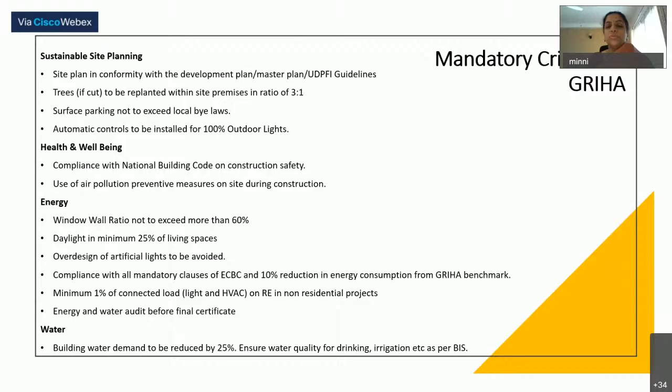Water quality has to be met as per BIS standards. Plus, building water demand should be reduced by at least 25% from the benchmark.

We had also done quantifications for every tool, for energy and for water. So if it is GRIHA 5-star, and suppose the benchmark is 90 units per square meter per annum, a 5-star building means a 40% reduction from this benchmark. We can quantify how much savings we can achieve.

We had quantified at a particular time that if 10 million square meters of buildings in India are GRIHA 5-star, then one could power another 100,000 homes. We would have so much savings that we could meet the water demand of another 22,000 homes. Plus, it would mean 6 megawatts of rooftop PVs would be installed.

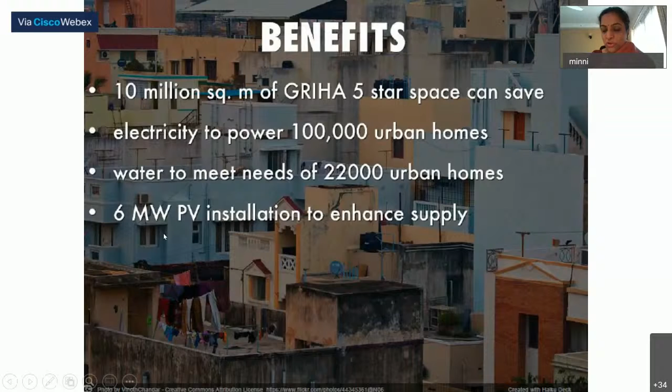So it is a very good resource for quantifying the savings one could have. Very quickly, let's look at the kind of architecture these certified buildings have shown.

So these are already built, already being occupied. This is a government building in Pune, where passive architecture, the louvers, the envelope, was completely designed as per the sun path of Pune. This is IIT Kanpur, very well designed, a Griha 5-star project again, meeting 10 to 20% of its energy demand, though it was not a net zero building.

See the kind of quality of light—it is glare-free diffuse daylight. This is possible because these certifications push building clients and consultants to do either hand-based calculations or software-based dynamic simulation, so you can predict daylight levels and energy consumption. This is the Suzlon One Earth project in Maharashtra, where double screening is given to cut heat gains while integrating light levels.

This is again inside Suzlon One Earth. You can see the openings are divided into two parts, so you have a vision window and a daylight window.

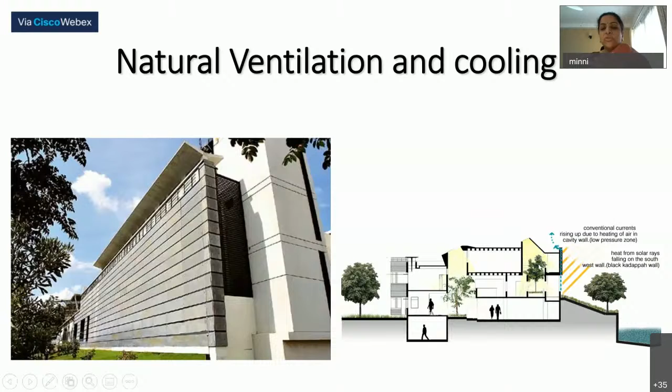You can see how the skylights have been designed based on the latitude angle towards the north orientation. Similarly, openings have been given to enhance stack effect and the quality of light in our TERI building in Bangalore, which is visually very comfortable. Occupants' comfort levels and productivity are very high because it's a fully naturally ventilated building.

Fortis hospitals were one of the first hospitals to get certification in the early 2000s when Griha was evolved—in fact, when it was called TERI Griha. Fortis, then AIIMS, and a series of hospitals started getting certified because they saw huge operational cost reductions, in crores, due to optimization of lighting and HVAC design. There isn't much scope for envelope optimization in hospitals, though insulation helps, but there's a huge scope for lighting and air conditioning.

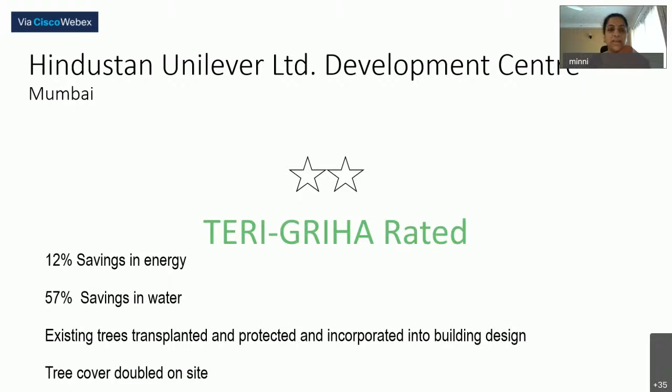Then this is HUL's development center in Mumbai. Again, this was a very interesting project—this project was in an almost warm and humid climate.

Warm and humid climate zones are more critical to address even when doing certification. This building was completely open from inside, meeting its natural ventilation mode for all the transitional spaces, for all the circulation areas, as well as natural daylight from inside. So it was an inside-open building.

I'm sure Chitra Vishwanath would have shared her project, which is highest certified, the Govardhan Eco Village. It's truly a bliss, I would say. Whenever you get a chance, one should definitely go and visit this place.

Completely designed, sustainability to its core. It's a part, it's in the blood of the system. It is like that, so whether it is architecture, whether it is placement of buildings based upon the hydrology of the site, location of water bodies, depending upon the topography. Everything is just net zero, sustainable building where they do not depend on anything from outside.

With bigger openings, huge overhangs to achieve comfort even in the humid climate zone of this location. It's not necessary that you have to have bigger buildings only. You could always have smaller footprints also, which get certified.

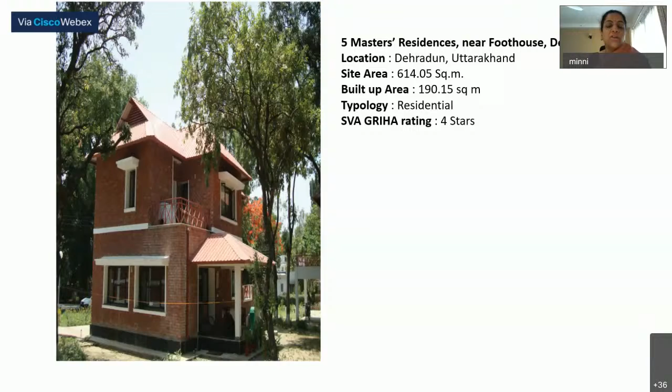We very strongly feel that all these certification systems, including Griha, have been a change maker in the building industry in the country. Now I see that it's almost going to be 11 o'clock, and Professor Prasanna, if you can help me with this.

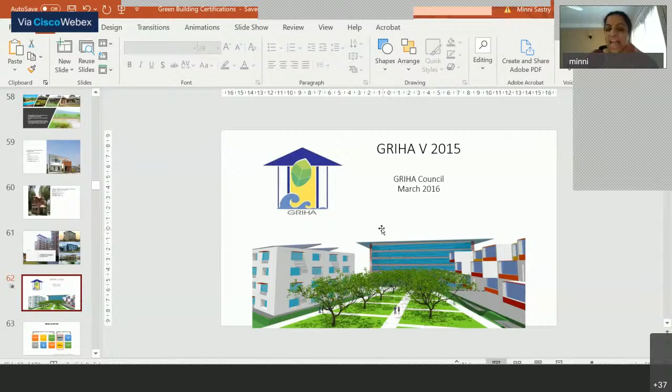I had about, I think, I'm actually just halfway down. So I don't know, should I stop here? You feel this is good? Or I had actually a Griha, quickly to showcase all the credits which are there, so that the participants are aware of the overall objective of every credit. Can I take maybe half an hour extra? Yeah, please, you may. I'll try. Okay, I had told Professor Tino one hour would be less, so I'll try to be as fast as possible.

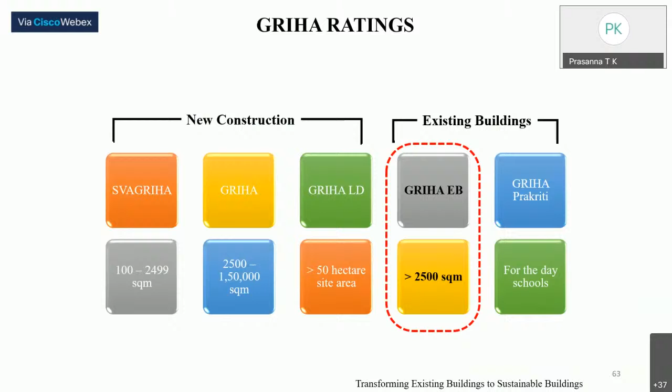Okay, so yeah, so I will just, would like to show you—some noise which is coming.

In all the certification systems, you register, you would have orientation workshops, and then you would have to submit your documents. There are also evaluation checks and verification checks that happen at site during construction. Finally, after you submit all your documents, you get a provisional rating, and then you get a final rating—in Griha it is always given only after one year of audit.

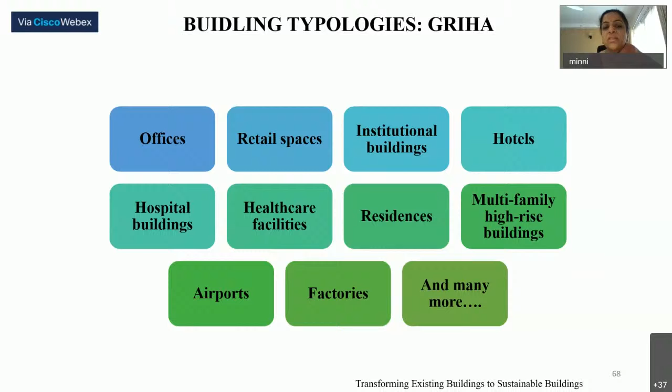As I had told, there are credits which are distributed in all the phases of the building: design, construction, operation, maintenance. I'm just going to skip filling. So all building typologies, whether it is hospital, airports, have also got GRIHA certified now—high-rise buildings, yeah, it's a star base.

So now you could have silver, gold, platinum in IGBC or LEED. In GRIHA it is a star-based rating system, and as I had said earlier, the more the points, the higher the star. So let's look at site.

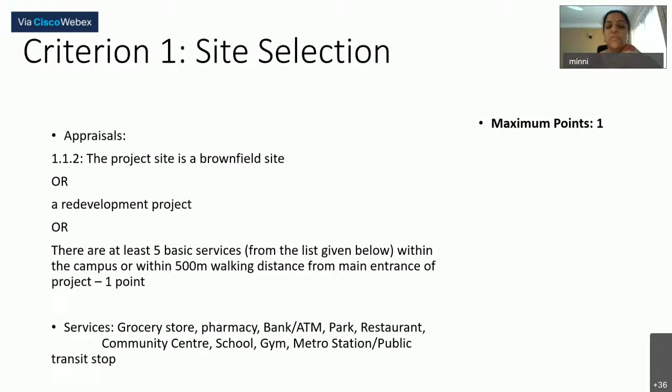At site, as I had told earlier, it's mandatory—it has to be as per the development plan. You start getting points if you have a brownfield site. It is an advantage because we are not then affecting a virgin site, or if it's a redevelopment project. Or if not, if you are developing on a virgin site, which is not a redevelopment nor a brownfield site, then it will have to make sure that there are basic services available within 500 meters of walking distance from the site.

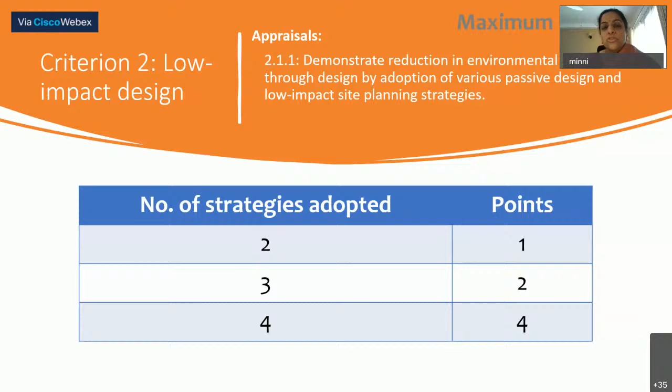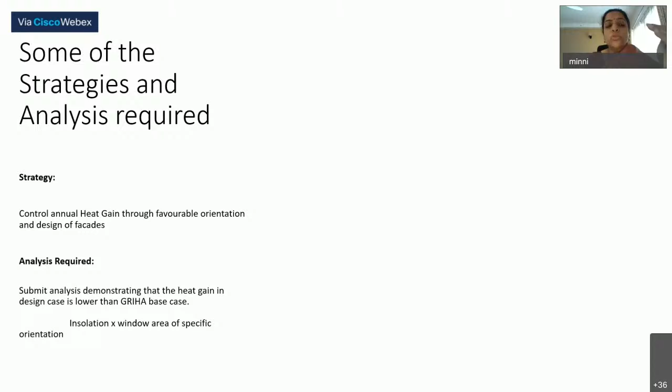That's site selection, that's the first credit. The second credit under site planning is on low impact design. Here we look at various ways of seeing that, because of the majorly cooling dominating climates that we have, at site level various interventions—whether through landscape or through your orientation design, through your window design—how favorably you have designed to address that particular city's climate, that particular city's sun path diagram, to reduce heat gains from your building envelope.

That's at site level itself, and implementation of SUDS, or sustainable urban drainage systems—here we look at site level. Again, a very important aspect is that 90% of the rainwater, we try for 100%, should retain within the site. It should not go outside because it's a resource.

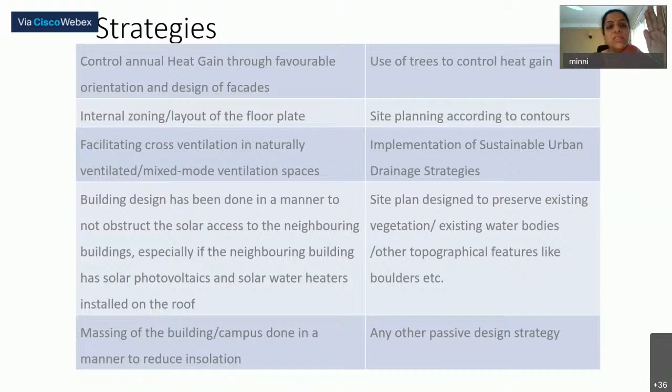If we do that, we also reduce urban flooding. These are the various strategies that we look at on site. Another important one is climate responsive site selection, SUDs, and UHI - urban heat island.

For large developments, we have to make sure there's a goal: when you develop a large campus or township, you cannot increase the temperature after built-up by more than 2 degrees Celsius compared to before construction. Monitoring is done pre and post.

But for individual buildings or smaller footprints, there is a credit on UHI where we talk about hard surface quality. Wherever you have pavements or roofs, all surfaces which have a view factor to the sky have to be more than 50% to get maximum points.

Surfaces have to either be shaded, or have perviousness, or have a high SRI - solar reflectance index coating - which is light in color, so that there is porosity. We look at reducing imperviousness at site level and having more porosity at site level. Also, if you have light colored roof surfaces, they reflect back the heat. That is what is there at the UHI level.

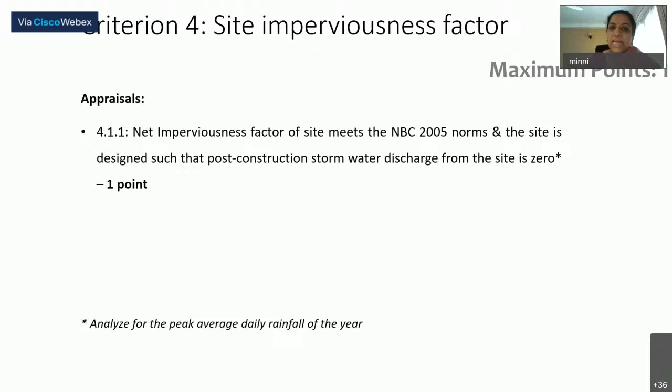Also with UHI, in this particular version of GRIHA, we had segregated UHI into an imperviousness factor, but they mean the same thing. These imperviousness factors, depending upon building typology, are given in the National Building Code, which one has to follow. The lower the imperviousness factor, the better, because that means your site has more porosity - it would still be very similar to what it was pre-construction.

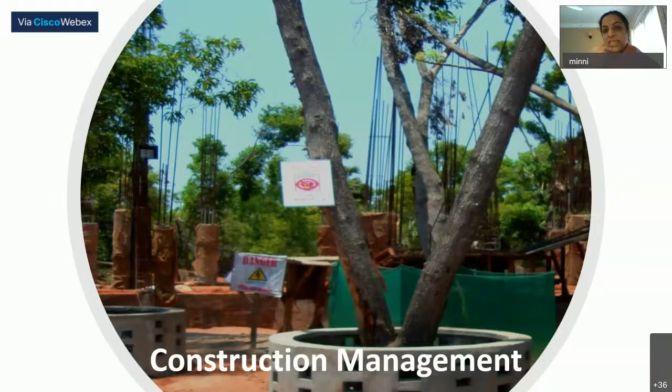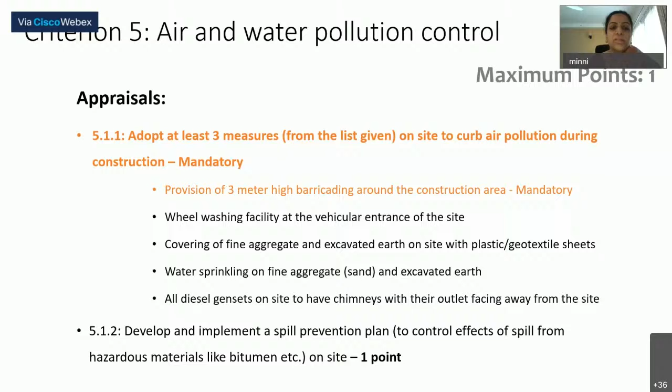Then, in the site section itself, we have construction management, because that also comes at site - where you prepare the site so you are not the cause of air and water pollution to the city or neighborhood. This means dust control measures, barricading your site and construction area from neighboring sites, and making sure vehicles traveling in and out of the site are well covered. There are several recommendations when projects get certified, given under these criteria, which have to be followed.

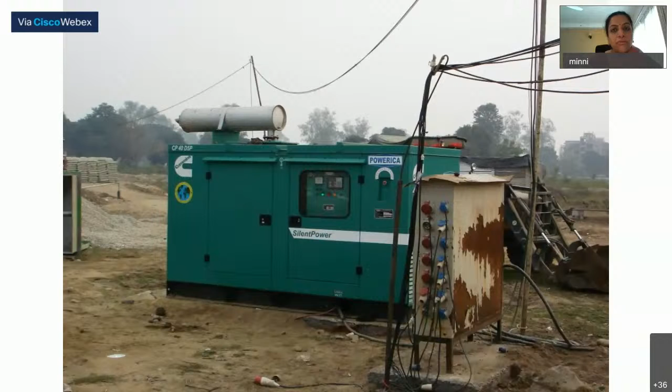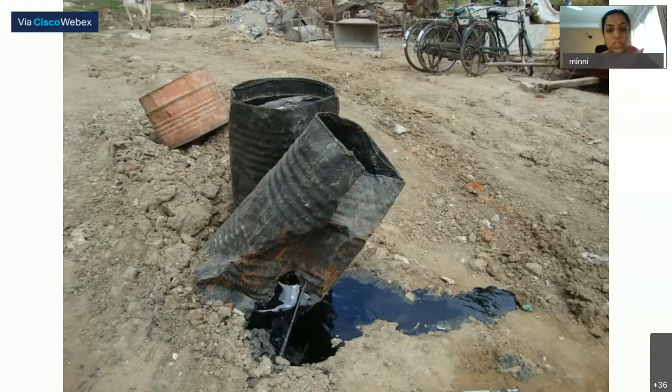This is not acceptable - you have to have proper chimneys if you have DG units, so that whatever smoke is coming out is not affecting the immediate occupants. Spilling is not at all acceptable. If this is how the site is, these projects do not get GRIHA certification.

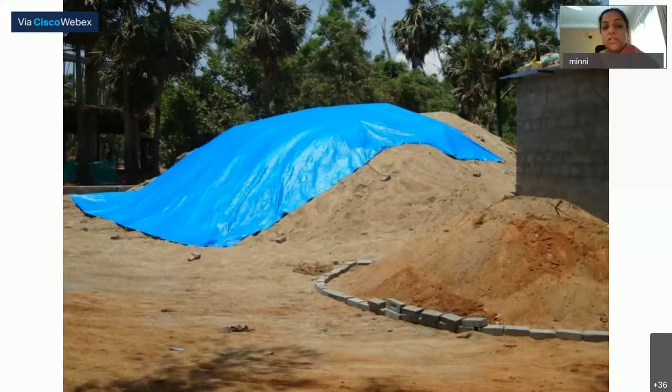There are recommendations given on how you barricade your site, how you make sure your wheels are cleaned, your materials are covered. Inside the site, there is proper stacking and management - where material has to be stacked, where hazardous material has to be, and how you manage that. All that is given under the construction management criteria.

Also under this comes preservation and protection of landscapes. Whatever the vegetation was, as I was saying earlier, it's mandatory - whatever is orange is mandatory. You should not cut; if you cut, it is a 1:4 ratio - you have to grow back. If you grow more, or preserve topsoil, you get more points.

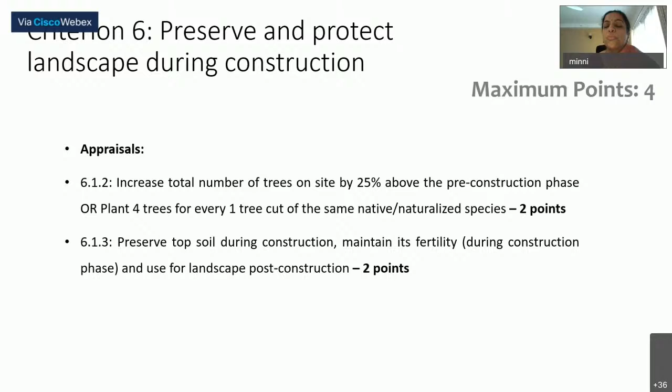One has to adopt staging - you cannot just remove everything if you have 10 acres. There has to be staging done so it has the least impact on biodiversity and on pollution, and also adopt methods to reduce movement of soil outside.

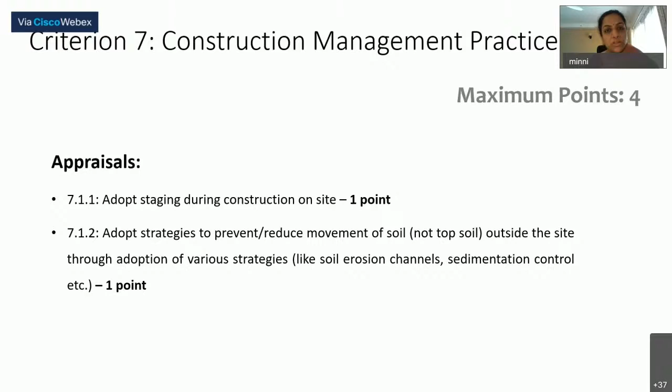A lot of times our city drains get clogged because of construction material which flows with rainwater into our storm drainage pipes, and that's a huge cause of flooding nowadays - majorly due to construction material. So in all GRIHA and green building certified buildings, the soil of the site cannot go outside the site. You have to have sedimentation tanks and trenches to make sure rainwater is not carrying soil and construction material outside the site.

Then you have to adopt measures to reduce water consumption.

We will see later that it is also at building and landscape level, but at construction level on site, we look at how to reduce water consumption for construction. Here we don't have benchmarks—it's a qualitative criteria because it's still not being developed.

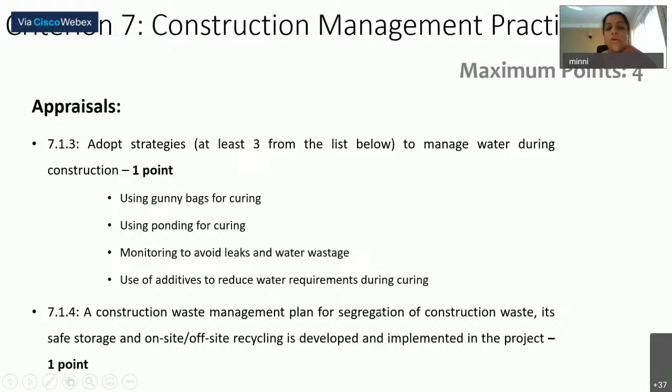This was an example from IIT Kanpur, where we had the blue line, which is the site line. The red was the disturbed area—so nothing was disturbed there, that staging was done. In fact, topsoil from here was removed and stacked here, and we had a physical and a water barrier.

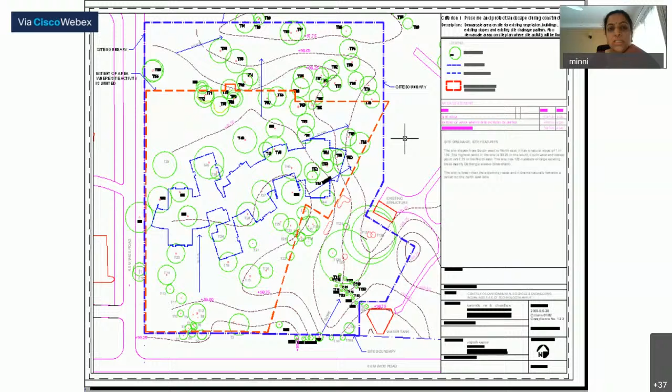So there was a trench put here with sedimentation tanks in two lowermost locations, so that all the sediments from construction settle down, and then that water goes out of the site.

These have to be protected so that construction material is not stacked around them. Only then would those trees live through the construction time. This is how you end up having these trenches which take your rainwater to the sedimentation tanks for settling.

Next most important criteria after site is energy. There we look at efficiency in our appliances, optimization of design, and finally the EPI, after complying with all the codes, having the best of the design—the benchmarks that we look at. So these all help us in reducing the demand.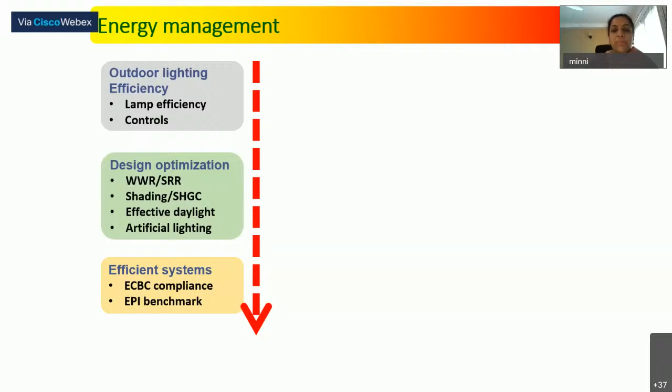And we have RE systems installed—that's the supply system that we're looking at. So the complete credits are revolving around these two things: how do we reduce the supply and demand from the RE?

Now for air-conditioned buildings and for naturally ventilated buildings, there are a bit different criteria and requirements in GRIHA. The best part in GRIHA is that for naturally ventilated buildings, there's a lot of advantage if one shows that they're achieving thermal comfort but still meeting the benchmarks. So ECBC is a mandatory requirement—we have given thresholds that depending upon climate, from the building envelope you cannot have heat gains more than these benchmarks.

So in moderate climate, for example, the outside is not so adverse, and that is why this is also more stringent—the criteria is also more stringent. While in composite climate, it's tougher—the climate is extreme, so it's 40 watts per square meter. This is the building heat gain which is acceptable.

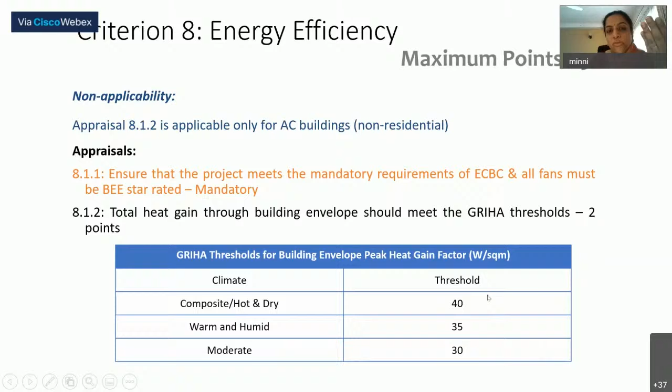If you can prove through simulations based upon what you have selected for your building envelope, you get points. 100% of outdoor lighting has to have the luminous efficacy defined by GRIHA for all outdoor lamps.

Then EPI has to be met—that's mandatory. Once you start showing that you are 10%, 20% lower than the benchmark given for your building, for your climate, by GRIHA, then you start getting points. At 50% below the benchmark, you get the highest points in GRIHA.

These benchmarks keep changing. So from 1st January 2021, we have a new set, very similar to this again. There are few differences, but majorly, one is looking at: if it is a daytime occupied building, your building cannot consume more than this. Moderate climate is a very small area in our country, but it's this 90—so your building, if it's consuming less than 90 units per square meter per annum, only then can it get certified under GRIHA.

Now this is very easy in a naturally ventilated building because the consumption is very low—so automatically the consumption comes to around 30 and lower. But then the challenge is that in GRIHA, you also have to show that those naturally ventilated buildings are achieving thermal comfort, as defined by the National Building Code or ASHRAE Standard 55, for more than 90% of the time. Only then do you get your certification.

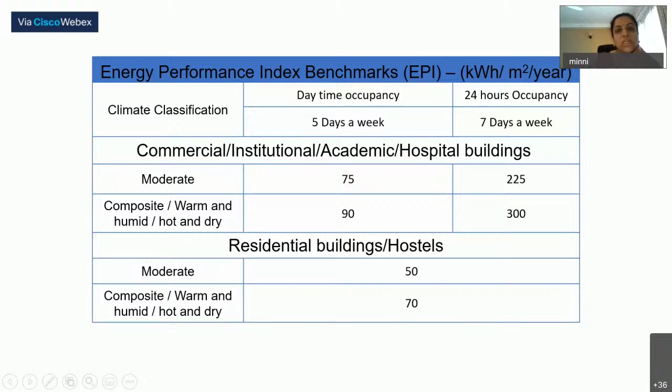If it is a 24-hour occupied building, like hospitals, it cannot use this kind of number. These numbers are for daytime occupied buildings, and for residential buildings there is a different benchmark. These benchmarks also keep updating on the Griha website, so you can always go and visit it.

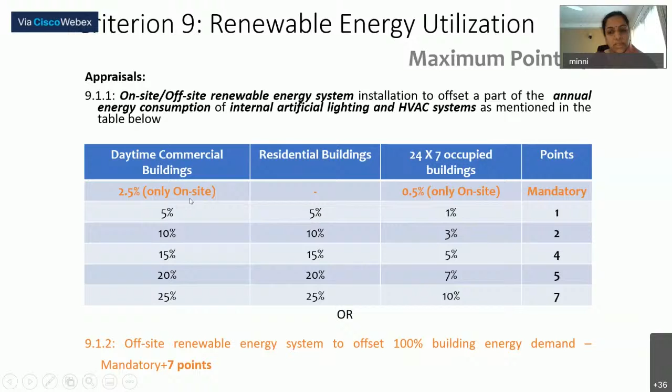I have already talked about EPI. Now, renewable energy: since Griha was adopted by the Ministry of New and Renewable Energy, for all non-residential buildings it is mandatory that a certain percentage of energy demand is met through renewable energy. If you increase the percentage met, the number of points also increases.

Another criteria under energy, which is mandatory and does not give points in Griha, is to select low ozone depleting potential materials. All insulation and refrigeration systems have to be CFC and HCFC free. There is awareness now, and nobody uses insulation or refrigerants with CFC or HCFC because of their ozone depleting potential. Also, all fire suppression systems have to be halon free. This is mandatory.

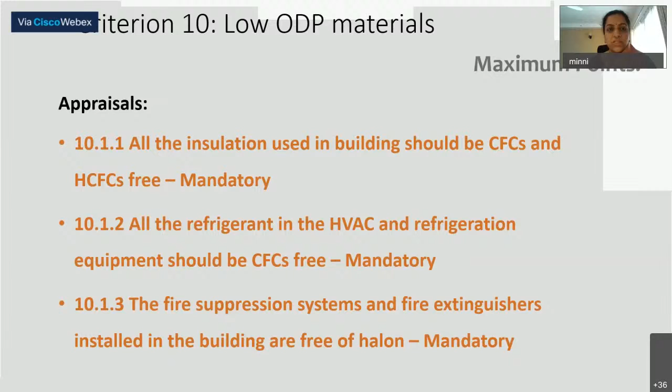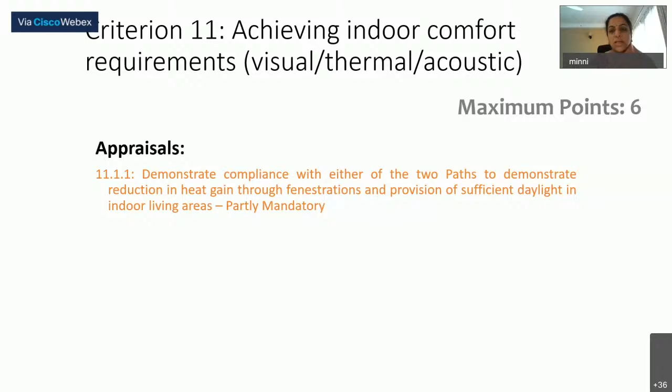After energy comes comfort. It becomes easy for naturally ventilated buildings to score here. The next criteria is on comfort, where daylight integration is mandatory in GRIHA, and there are several methods given - it could be manual or through simulations like DA, UDI, DF. There are several methods nowadays that are acceptable.

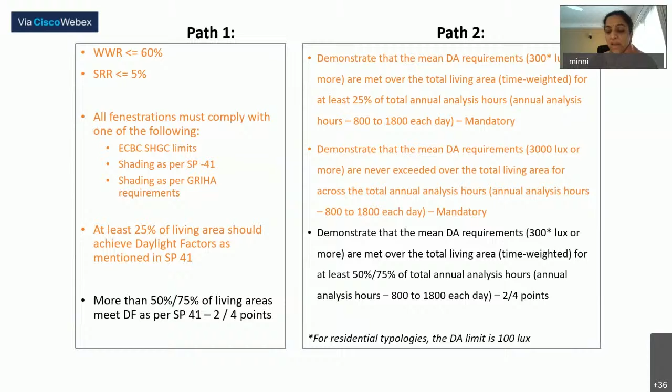Everything is acceptable, including the super ECBC method, where we look at between 100 lux to 2000 lux so that we have good uniform daylight levels. It is mandatory in Griha to achieve daylight integration for at least 25% of spaces, which can be done manually or through simulations.

Artificial lighting design also has to follow NBC - again a mandatory criteria. And to remove glare, the minimum uniformity ratio prescribed in Griha is 0.40.

Then 11.1.3 talks about thermal comfort. It is mandatory that the project demonstrates this, mostly through simulations, using engines like Design Builder, ATAS, TRNSYS, or IES, to show that the indoor conditions of the building meet ASHRAE 55 or NBC adaptive comfort models that are described.

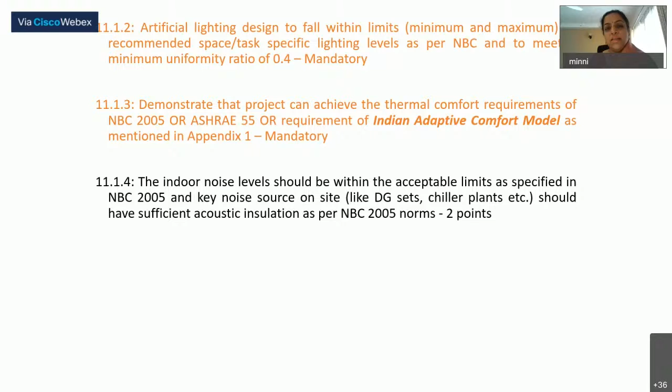There is one more criteria under comfort, on acoustics and noise level. If there is some source of outdoor noise, you have to ensure that, as per NBC, the indoor noise levels for whatever building typology you're building are within the limits. This is then checked during the audit.

Maintaining indoor air quality is also part of the energy performance criteria, and this becomes very critical for naturally ventilated buildings, which is given a lot of emphasis in Griha. For example, some schools want to get certified, but you cannot get certified if you are right on the road with a lot of pollution and dust, because those students and occupants would definitely have respiratory problems.

So it's important in Griha that you show your indoor air quality meets pollution control board standards for PM10 and PM2.5, the kind of ppm defined by CPCB. Only then do you get points. You get other points if you have monitoring systems for CO2, temperature, and RH, keeping them all in control so occupants are comfortable. This criteria becomes especially important for naturally ventilated spaces.

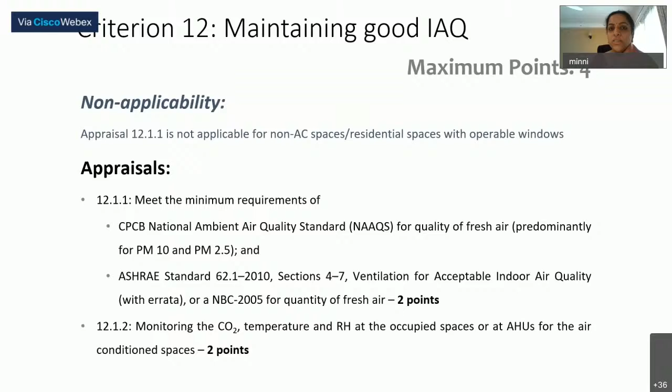Then there are other indoor air quality related criteria, common across all certification systems. In many new buildings or newly done interiors, you get vapors that irritate your eyes, give headaches, or cause respiratory issues from the smell of new furniture. You would never get this in a green building, because there you have to ensure all interior finishes, resins,

sealants, adhesives, and fevicols used have low or zero VOC, and they cannot use urea formaldehyde at all as a bonding resin. These limits, when projects get registered, are defined by Griha and by IGBC.

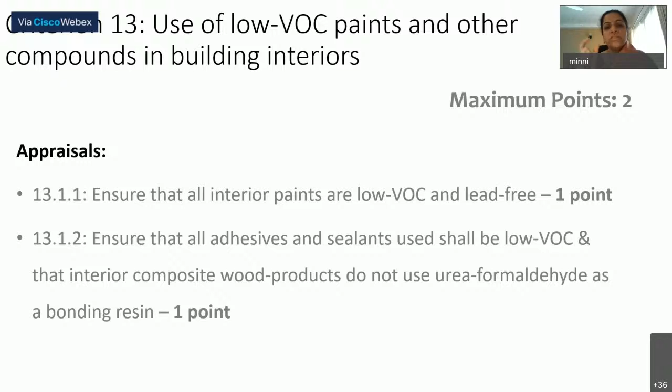What are the limits, what are the levels for various interior paints, adhesives, and sealants, are all defined in the certification that we complete: energy, comfort, and site.

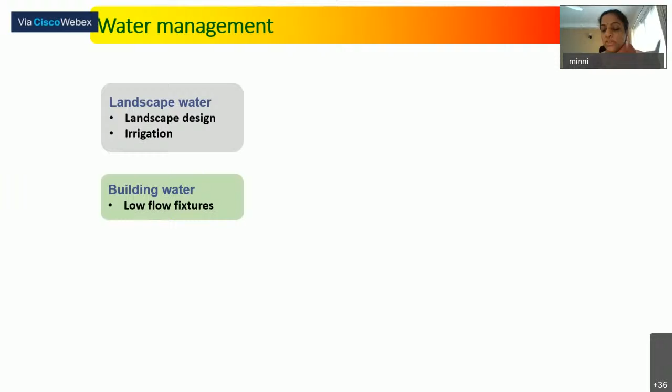For water, again like in energy, we had the demand side and supply side. At construction, there was a qualitative criteria giving recommendations to reduce water demand using admixtures or gunny bags. But at building and site level, we look at landscape water demand, building water, and construction water in the site section. We have to ensure all three reduce demand while increasing treatment and recycling of water plus rainwater harvesting.

So always our aim is to achieve net zero: reduce the demand and do the supply through sustainable sources. This is always the agenda for all certification systems. Now, how do you reduce the demand?

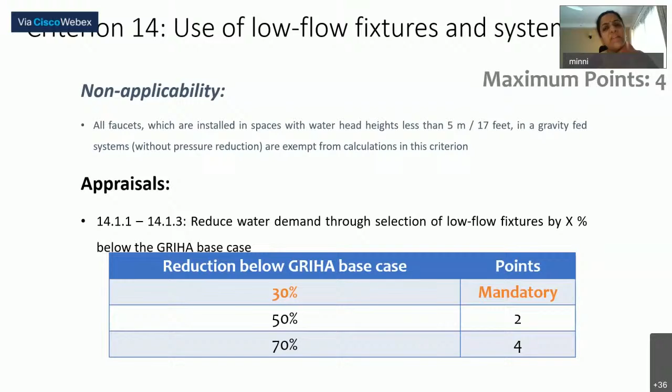At building level, it is straightforward - one has to use very efficient faucets and fixtures, which is common practice nowadays. It wasn't when these certification systems came in early 2000s, but now it's common practice and easy to achieve this credit, where you have dual flush systems, 4 and 3 liters, separate for solid and liquid waste.

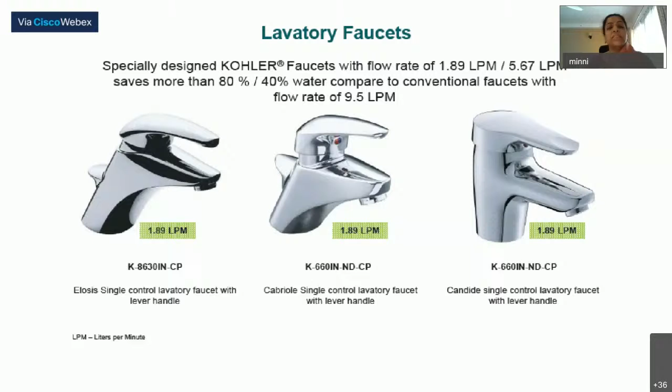You have aerators in your faucets, whereas earlier conventional times we used to have 9 liters per minute of flow. During these COVID times, for at least 20 seconds, about half a minute, one has to wash hands, so that's water being used. We now have faucets as low as 2 or 1.9 liters per minute flow rate.

These are already available, maybe just a bit higher in cost, but if you do life cycle cost analysis, we've seen amazing results. One has to have water efficient fixtures in place and treat water to reuse, because you get a very quick payback due to lesser dependence. In cities like Bangalore where there is tanker water, the payback period is very less if you have a net zero water building.

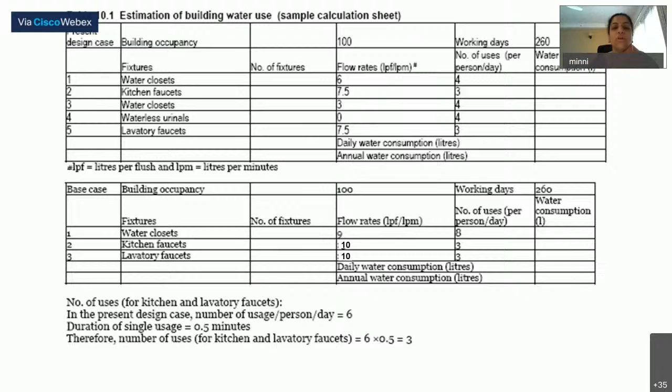So the consumptions, there are spreadsheets given. I'm not getting into details right now due to time.

For landscape, the base case is a lawn. Lawns are the highest consuming species, and the same strategies are used across all certifications - recommending native species, efficiency in irrigation systems, and lesser lawn areas. If you follow these three, you would end up consuming lesser land or water for your landscape.

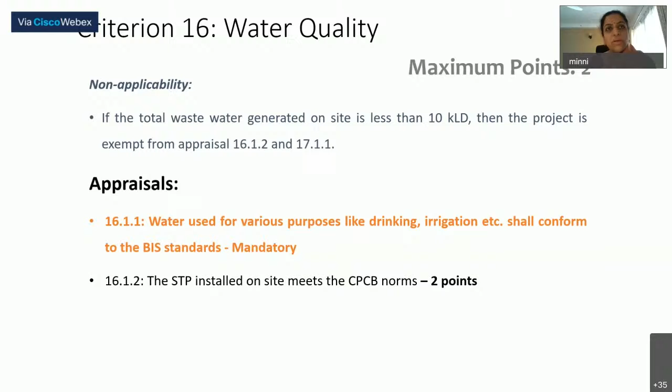Once you reduce your building and landscape water demand, you also have to meet a mandatory criteria in Griha that whatever purpose the water is being used for, it has to meet the BIS standards.

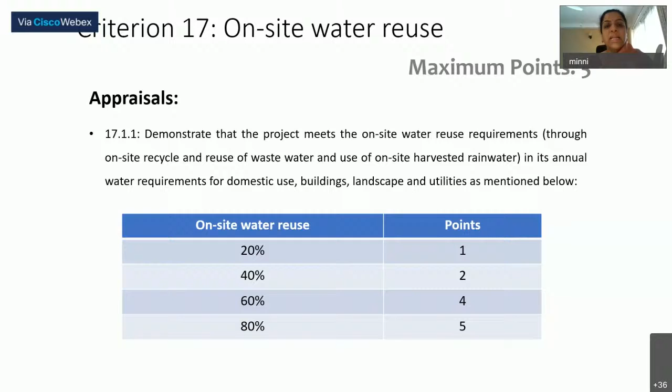Finally, the last criteria in Griha on water looks at the entire reuse, recycling, and water cycle. This table shows us how much percentage - the higher it is, coming up to 100% water reused, meaning it is either harvested or treated and reused back.

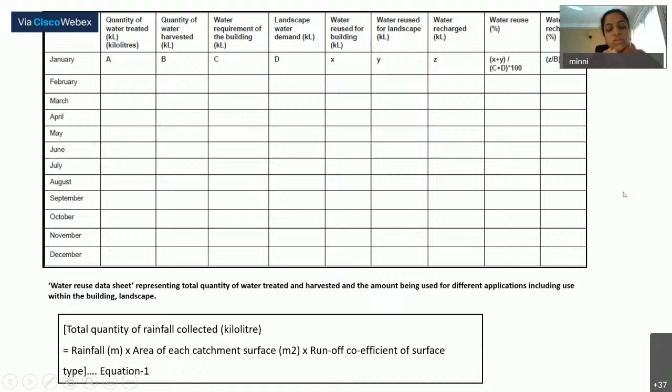We are not depending at all on non-sustainable sources of water, then those projects get the highest points. This table is also - once you register your project, you get all these calculators, which really makes the life of the consultant and owners easy to quantify.

And then if there is any surplus water, and if the water table and municipality bylaws are supporting, water recharge is also given a separate point in Griha, not in other rating systems.

Sustainable building materials - one has to reduce the embodied energy, that is the criteria here. It is given in various ways, use of waste like fly ash from thermal power plants, and there are various credits. So you can really earn a lot.

You can earn up to 6 points in this credit, because with waste, we want to reduce our loads on landfills. If one replaces fly ash in OPC, in structural concrete, uses fly ash blocks, or replaces OPC by fly ash in mortar or plaster, depending upon the percentages given in Griha, and also meets the BIS structural standards, you get points.

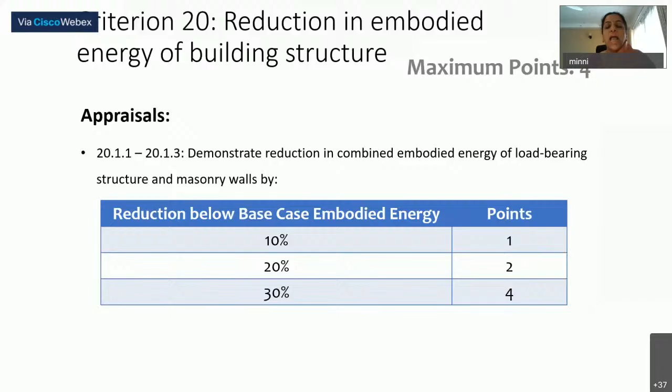There is also a criteria in building materials about using waste to reduce your embodied energy, which talks about construction materials and construction technologies that can be used to reduce your building structure's embodied energy. There is a detailed spreadsheet and calculation methodology given, so you can either reduce the quantity of material or use a different technology or material.

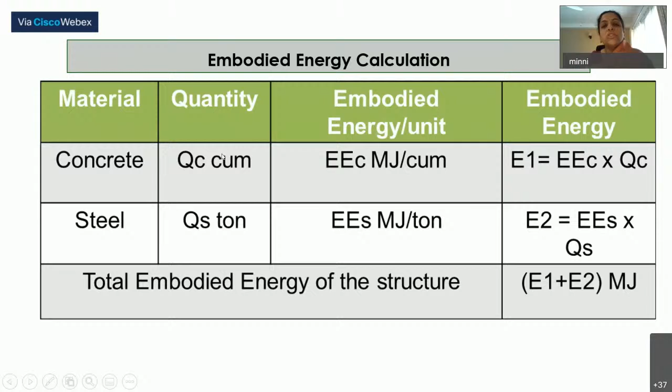For example, in Chitra Vishwanath's Govardhan Eco Village, instead of fire burnt clay, adobe is used, and the embodied energy number is much lower compared to the base case. So you can either show a reduction in quantity, because embodied energy is nothing but the quantity of material used multiplied by its embodied energy per unit. You can show either way what is more efficient, what consumes less energy, and prove that your structure has a lower embodied energy.

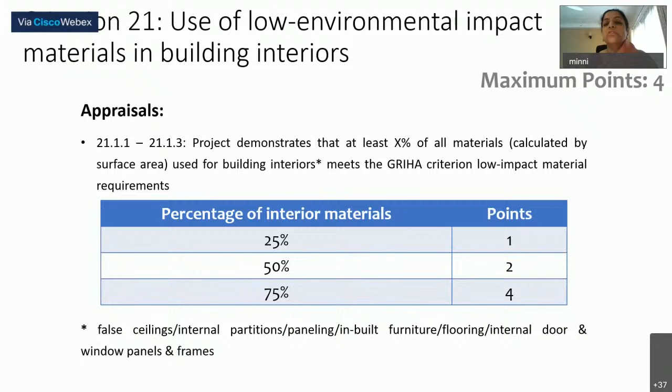That's for the structure, the block work and so on. For interiors also, all certification systems have criteria to make sure that even the internal finishes and materials used have low environmental impact.

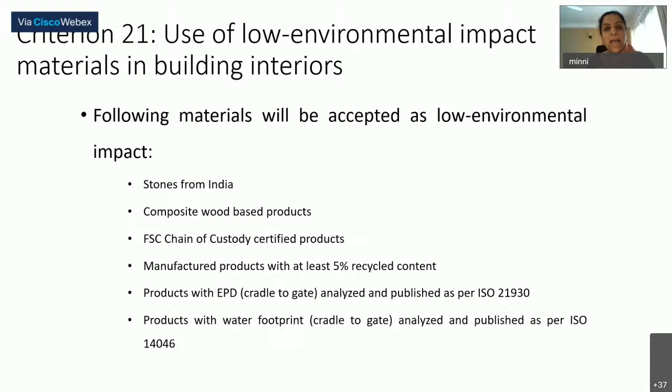So basically the trend is to push clients and owners to use more local materials, which have more recycled content, which are locally sourced, and where the life cycle cost—whether it is cradle to gate till now in Griha, it could be cradle to cradle later as we advance—the environmental impact across the life cycle of those products is lesser.

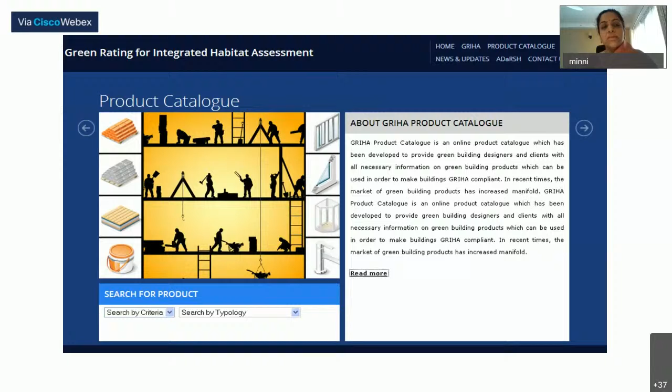All these products, when we talk about wood, it is more of a composite wood, not teak, but wood taken from plantations like bamboo or rubber, which don't have a huge impact. There's a wonderful tool which shows various types of products under various categories, whether it's floor, block work, roof or tiles. This is by Griha—if you go on their portal you can see this and the greenness of all the materials.

So we are almost towards the end, where we look at solid waste management. This was there at construction time also—at construction level we have to ensure wastes are segregated, hazardous waste identified, and waste can be recycled back into the construction industry. They have to be segregated, and there is minimization of waste.

And there are several guidelines given on common practices to reduce waste generation during construction. That's at one level. Now there are different criteria and points given for during operation time.

It's important, again as a basic principle, to segregate waste, and for that you have to design the capacity of various bins depending on the building typology, and have storage areas, because it does not go for recycling the same day if it has to leave the site. So you need a storage space defined and designed in your architectural design, and tie-ups with recycling industry partners. If all this is set, you get all the points in this credit.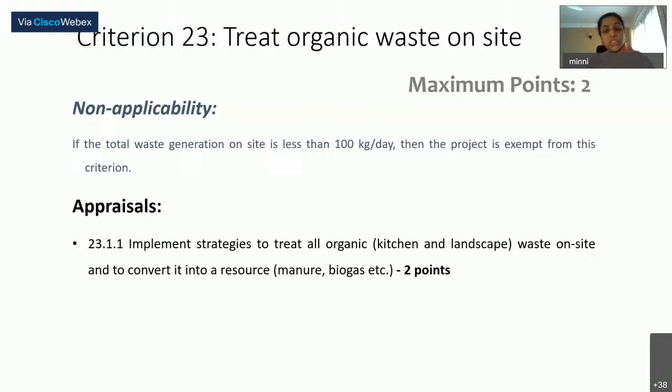There is a separate credit under waste for treatment of organic waste, whether for composting or biogas generation, which could be used for energy or cooking purposes depending on what the campus is all about. So zero wet waste should go outside all certified buildings.

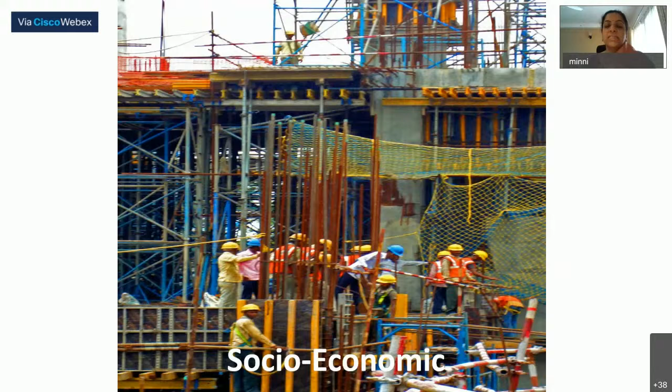Then it is socioeconomic. It's important that when talking about sustainability, we're not only looking at the comfort of occupants or the global climate change aspect, but also taking care of people who are building and the maintenance people who will be operating. Their health and safety must also be taken care of—only then is it true sustainable development.

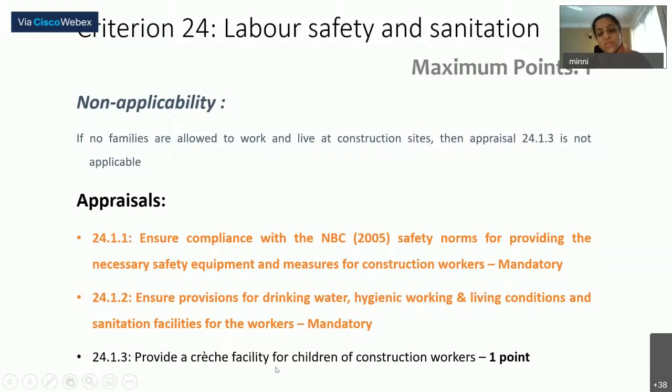So it is mandatory in GRIHA to follow all the safety measures given in NBC, to provide hygienic working conditions, sanitation facilities, and drinking water. All this is mandatory, and above this, if a creche is provided for children—because it's been observed that children get into wrong deeds otherwise if parents are busy—then if a creche facility involves children in certain activities, those projects get additional points.

As I said earlier, in India it's not a common practice to have all our buildings universally accessible. So it is not mandatory, but you get points if your building is designed so that it can be used by people who are differently abled as well. And again, one has to follow the NBC.

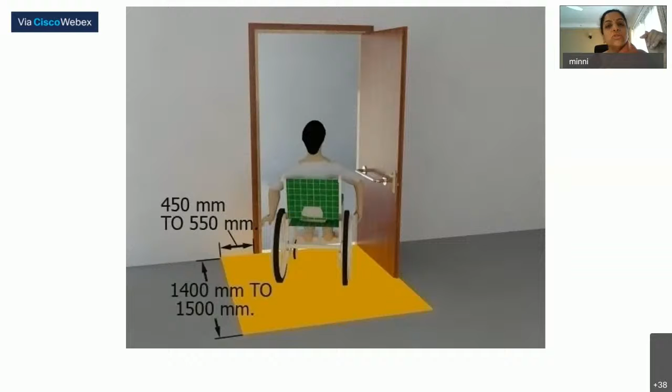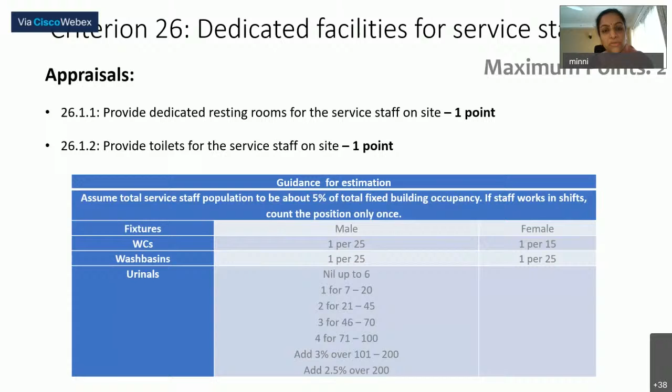All these certification systems mean you do not have to refer to other codes or standards. It's one document which helps you comply with all the important critical issues required for sustainability of a project. Under social aspects also, there should be dedicated facilities for service staff.

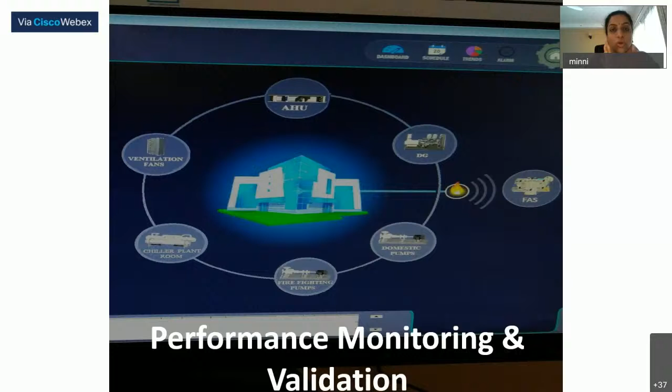And finally, this is the last section, for all certification systems, it's about monitoring and validating, making sure that whatever design was done, the construction was carried out, and the operation of the building through its life is also the same. Only then does the building keep getting recertified again and again.

So metering and monitoring is a very critical issue. It is in fact mandatory to have basic metering done. Basic metering means the sources are metered, whether it is energy from the utility grid, on-site renewable energy source, or DG sets, at each building level in your campus. Similarly for water, whatever the source points are, digital meters have to be installed.

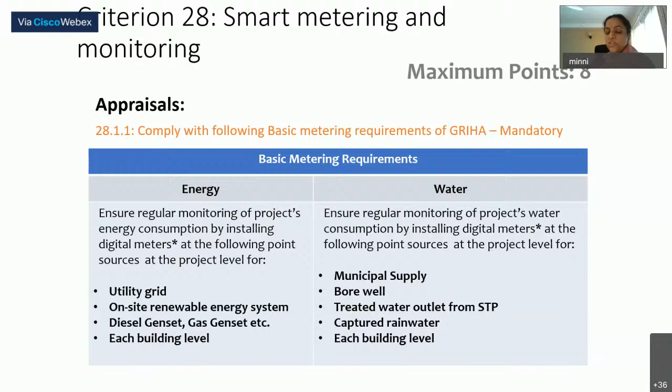This is mandatory for both energy and water. Whatever the sources are, they have to be digitally metered. Now you start getting points, meaning you are more committed and want to be more aware of your resource consumption. Then you do extended metering.

When we look at energy, extended metering means inside the building also I would like to know my air conditioning consumption, my lighting consumption, where there's more scope for improvement, my UPS consumption, can I have a better server system, can I increase my efficiency. If I want to know how I can be better, I need this further division. This is the extended monitoring that is required, and you get more points.

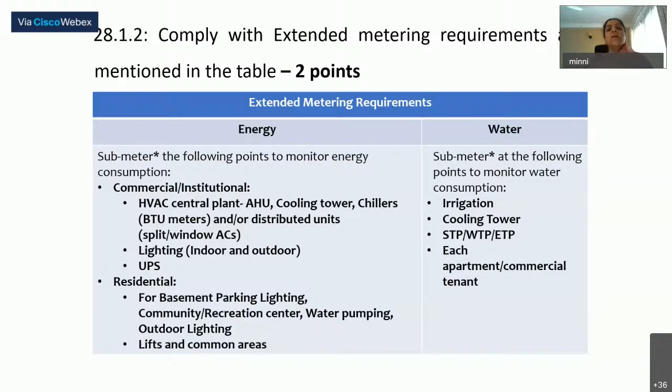Similarly in water, not only at source level, but at various supply points for irrigation, building level, or apartment level, each apartment is metered. Or wherever there's HVAC, if there's a cooling tower, what is the water consumption by the air conditioning units. So it is extended metering.

Now there is one more level. If you start doing smart metering, it's hourly metering with alarms. If your benchmark is increasing, maybe at a particular point during the day, during peak time, air conditioning and equipment are running at peak, you may go above the benchmark. So there's an alarm system, doing hourly metering and communicating to the operating team how far away we are from the benchmarks, for example. So there is smart metering.

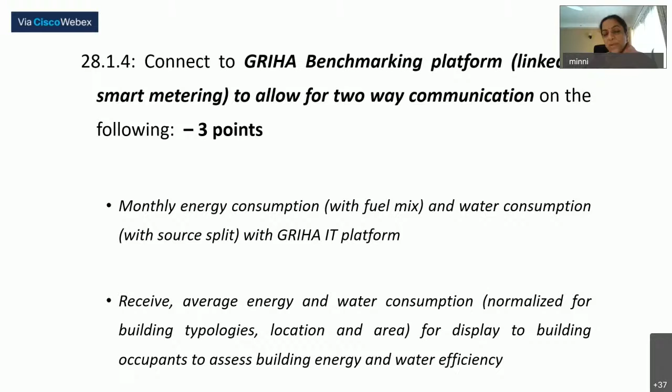You get maximum points if, from the smart metering, you also start giving your data back to the GRIHA platform, because then GRIHA can look at similar building typologies. So if I have 10 hospitals in a composite climate, they can see that one hospital is consuming this much while another is consuming much higher. So what is it that we need to do? This becomes something very smart and quantifiable, and it really helps you become more and more resource conscious, strengthening your commitment towards the environment and helping reduce the climate change aspect.

Infosys has been doing that for many years. They have a center in Bangalore where they monitor results, whether it is outside India or within India, every hour, which system, which air conditioning, which chiller is consuming how much, they can see everything. So we need smart metering systems to manage our resources well.

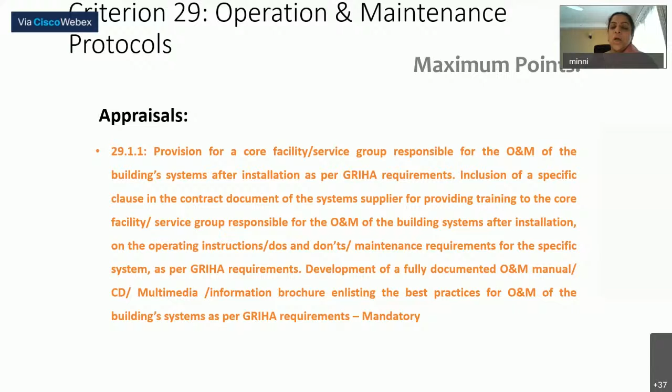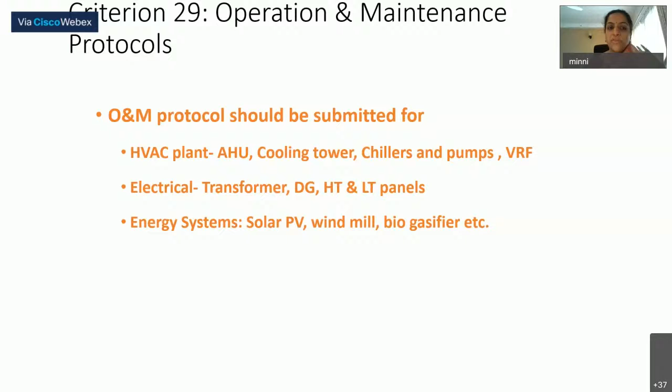O&M is again a mandatory clause in all certification systems, showing how the building has been designed. The operating team and maintenance team have to be made aware. There have to be O&M protocols and documents which have to be handed over to the facilities team.

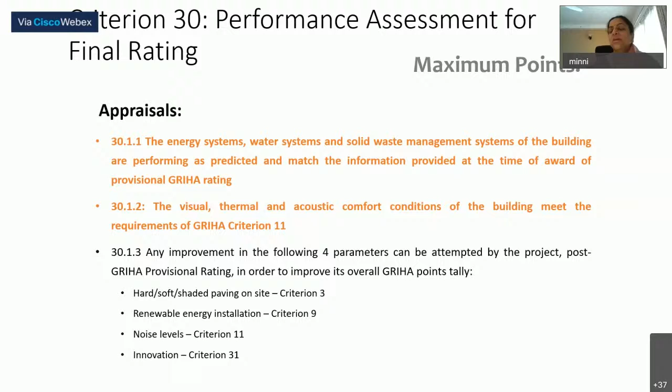The final assessment in GRIHA is different, the final certification is given after energy and water audit, and also the solid waste system, plus comfort - thermal, visual, acoustic comfort, whether noise levels are within limits or not. They are all monitored. What all can be quantified on site post occupancy are all measured, and only then the final certificate is given.

If projects do anything beyond what we just saw, they get innovations in all certification systems. That I end my session. Thank you so much, I would be happy to take up questions.